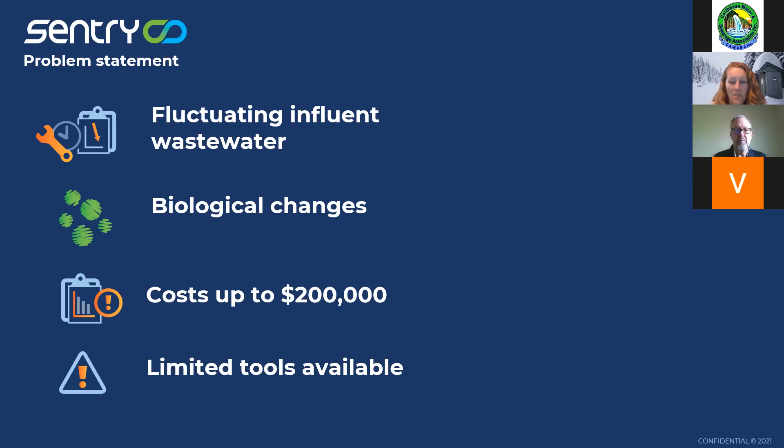As we get started, I always like to start our presentations with saying that at Sentry, we care about the environment, and we're focused on facilitating better water and wastewater treatment decisions for better environmental outcomes. We do that through offering this additional data. It seems simple enough as a mission, but as all of you know, as operators, there's a lot of factors and challenges which make wastewater treatment not the easiest task. You have your incoming influent, which is changing. You have upstream dischargers who are discharging things at any time, not necessarily telling you what's in the wastewater or when it's going to arrive, and that's well out of the operator's control. You're also working with a live biological process, which means there is variability in how the biology is going to react when the water arrives at the facility.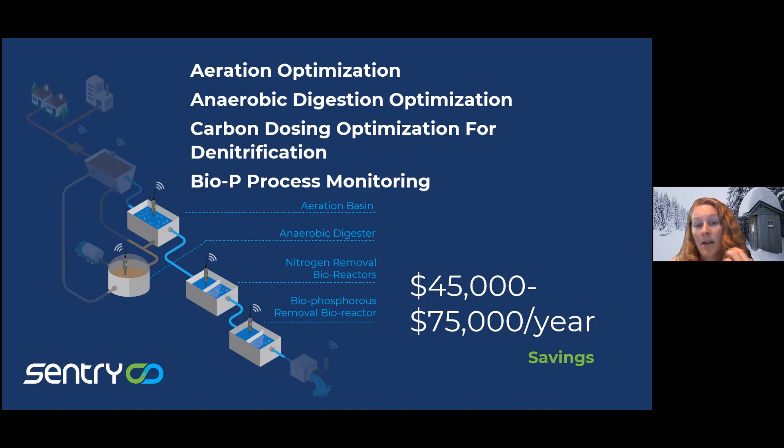So a little bit more information about the system itself, more tangibly. So we have the panel, which can be installed outside. A lot of wastewater treatment facilities are mostly external. So the panel is installed, and that's where we have the connectivity. It's kind of like the brains.

And then the sensor itself can be installed in a channel, which is a really effective place for having the right amount of flow into a tank, like an EQ tank, or into an inline, like a recirculation line. And so these different ways of installing allow a little bit more flexibility, because no two treatment plants are really alike. So as we're trying to figure out exactly where the best place is to get the data you're looking for, we're able to install it in a variety of locations at the facility.

The goal is that it's a low maintenance sensor. So as it uses the biofilm, we want that biofilm to grow on the sensor. And so we recommend at most monthly or quarterly inspections. And if it does need to be cleaned, then a rinse is usually adequate to dislodge any large debris.

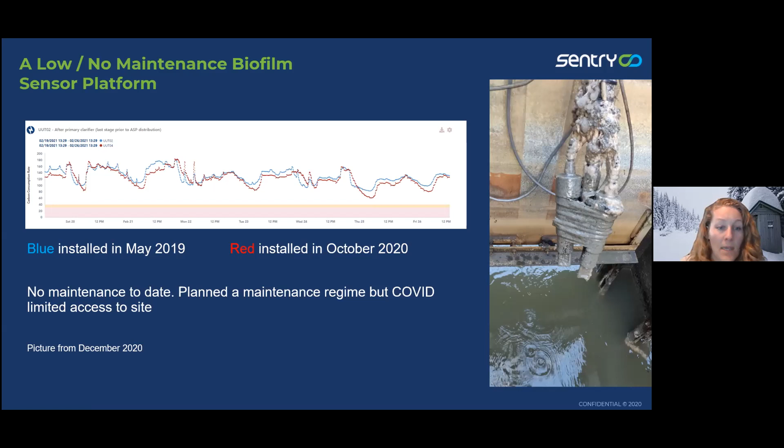So as Ignatius mentioned in the intro, we're now well over 130 installations globally, and that's in systems ranging from classic wastewater treatment, anaerobic digestion, heavy industry, and all the way to raw water intake monitoring, and even monitoring in the distribution system from drinking water facilities.

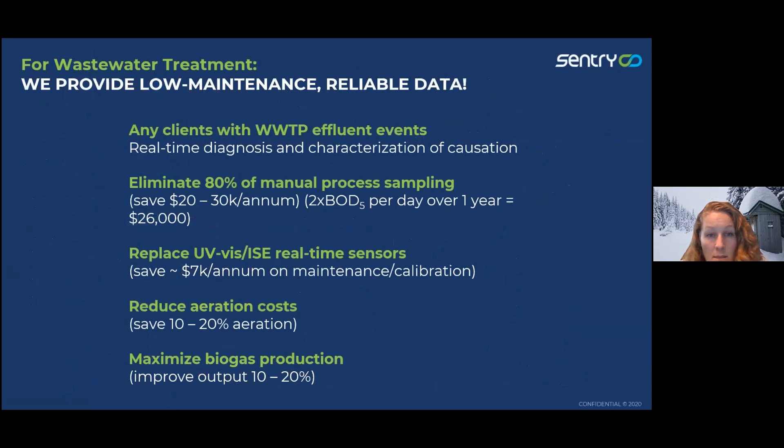So I'll jump forward a little bit and just talk again about the real value of having this real-time, ongoing, and biology-based monitoring, which is that it's giving a good indication of organic loading. Sure, COD and BOD do that too.

It's just that those are usually only one or two samples throughout the day at most, or you're looking at a composite. So you're not necessarily knowing what's coming in exactly when it came, to be able to make those adjustments on time. Or you're looking at a DO sensor or an ammonia probe sort of towards the end of the treatment train. So if you flag something that's out of range, there's not really a lot you can do to act on the water that's going by the sensor.

It's kind of already gone past. So having that upfront bio-based detection tells you how this water will impact your treatment biology. Is it going to like it and be really, really active? Or is it going to cause a die-off? So I need to be a little bit more vigilant about adding any supplemental carbon, or maybe doing a bypass, something, whatever is in your capacity at the facility to be able to manage that. But it tells you when you need to know, and not after.

And then the additional part is having such a large data set, with 1,400 data points per day. Now the patterning and the statistical analysis around what comes in on a Monday morning versus a Thursday afternoon can start to pick out the trends throughout the week, to be able to do preemptive planning, to do maintenance on lower load days, or to recognize that Mondays are going to be a tough one, whatever it is that you start to see in the data. And it can also help diagnose specific issues that may be reoccurring, to better identify them as they start.

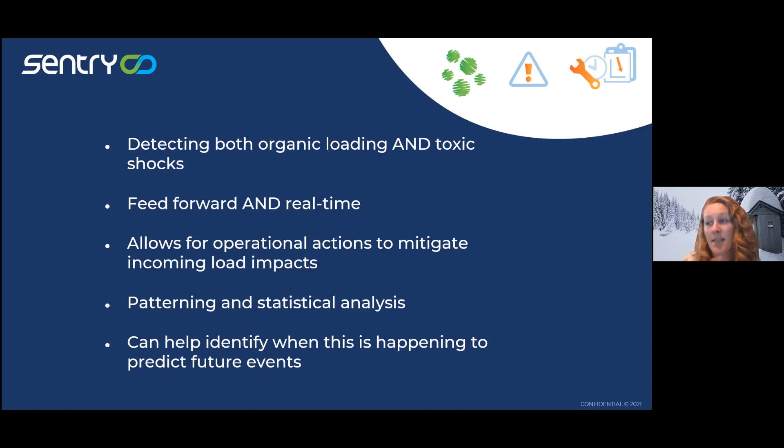So I will pass it over to Tim to talk about his experience at Bend. And while I do that, I'm going to pull up our statement of, our standard operating procedure. If I can find the right file here. Sorry, one second. There we go.

Just as a little bit of background on how the Sentry signal can be used to trigger some of the actions that would normally take place, or even increase your capacity to act as an operator.

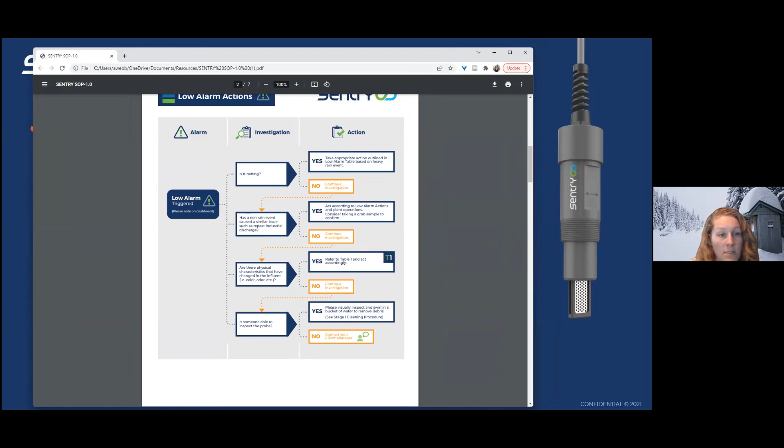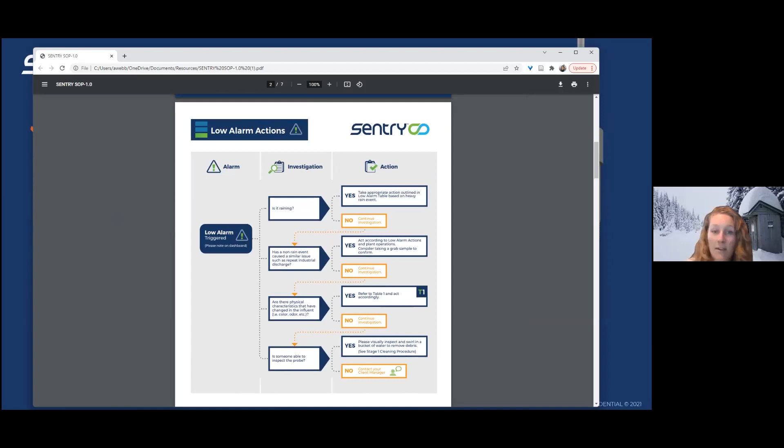Tim, I'm not sure if you wanted me to pull up the Bend slides, or did you want to just talk to them? Are the slides the case studies in your presentation? Let me double check and I will let you know. I don't think I have Bend. I can pull it up though. That's okay, you could go back to... oh wait, first, yes I do. It's here. Okay, good job, that's great.

Because the effluent from this facility is discharged into infiltration evaporation ponds, the regulatory agency wanted to make sure that the nitrates present in the effluent from the facility would not impact drinking water for the down gradient users of that groundwater. This facility is situated in a very popular tourist location.

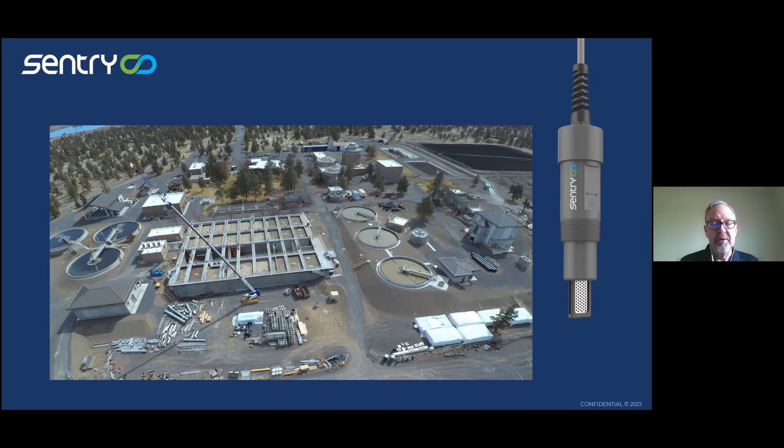The mountains are close by, so skiing, fishing, water sports generally, and hiking are all very important parts of the local economy, as is the 26 breweries that happen to be located in Bend. This facility has approximately 24 breweries connected to it of various sizes, some are 100 gallon fermenters up to 12,000 gallon fermenters. The municipal population is about 90,000.

The population equivalent, however, is more than double that, and that's because of the high strength waste associated with these breweries. As a result, I faced some challenges managing a plant with extreme swings in the organic loading coming into the facility, coupled with the COVID pandemic and the lack of human resources in the laboratory. I felt like I was flying blind a lot of the time.

Now, this sensor was installed in the primary effluent of one of the 3 primary clarifiers to give me an indication of the amount of organic matter that was going to go over to the activated sludge system. The facility has a lot of problems associated with poor settleability associated with a zoogloeal biomass, a slimy kind of biomass that would not settle very rapidly.

So I was forced to operate at very low solids retention times, so low that it became difficult to do nitrification and denitrification to get to our total nitrogen limitation.

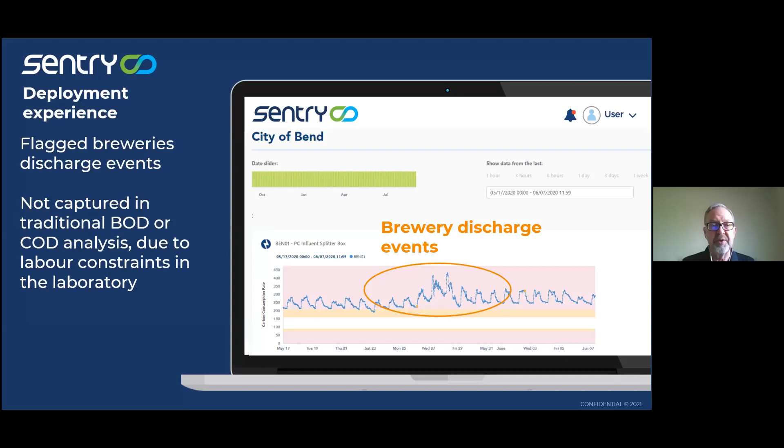As a result of seeing the organic loading increasing, there were a number of things that I, as a manager, could do to manage the processes of the plant to try and mitigate the effects of this slug load which is coming in.

One thing was to change the internal mixed liquor recycle rate to return more nitrates to the head of the anoxic zones at the front of the aeration tanks, with the idea that the oxygen atom on that nitrate molecule would be used for BOD respiration. It also gave me the ability to know when I could increase or decrease the DO set point in our aeration tanks, saving some electricity during that process.

It also allowed me to look at the pattern of organic loading into the plant, and because I had some control of the ability to return high concentration centrates from our dewatering processes, I could look at times of the day when the organic loading coming into the plant was low and return that high centrate concentration during that time of the day.

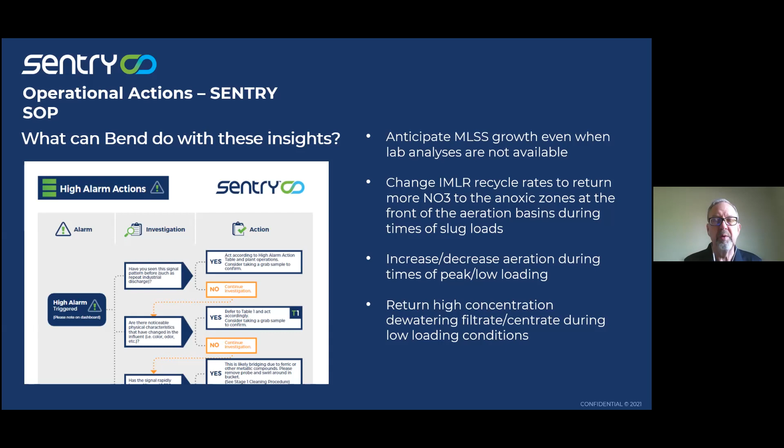Another example of optimization might be in a trickling filter, where you have the ability to change the recycle rate and you're looking at optimizing the amount of BOD removed in your facility. If you know the amount of BOD entering via the Sentry sensor, you could increase the recirculation rate through the trickling filter to remove more BOD before it goes to secondary clarification. That's another example of applicability, especially in warmer climates.

Nitrification and denitrification are other applications where we can help optimize loading ratios. I'm not sure how many of you are on the drinking water side, but I can also walk through a case on freshwater influent monitoring, source water monitoring like watershed management, and/or distribution, like chlorinated drinking water distribution. Not sure if any of those resonate with anyone.

Speak up, guys—glad to see something on the water side.

I can definitely do a water side one, and if people want to type their question in the chat, if you're not comfortable speaking out, or you have any audio challenges, feel free to get as technical as you'd like or as high level. We recognize this is a bit of an unusual approach to sensing technology where there's no chemical reactions—well, there are, but they're happening naturally with the biofilm. There's no catalysts or moving parts or consumables, or what do you call them—aliquots.

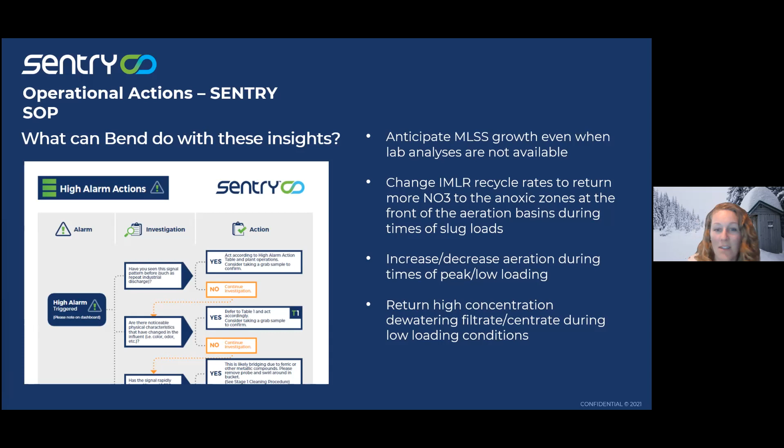So anyway, I'll stop talking for a minute and see if anyone does have any questions in the chat, or by raising your hand or just coming off mute. And then if not, I'll jump into some of the freshwater work that we're doing. Oh, I haven't seen anyone with any questions in the chat.

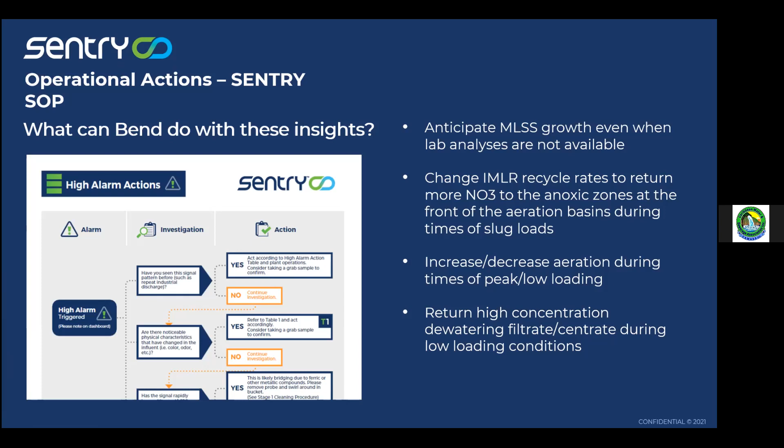So perhaps you can move on to the freshwater situation. Sure. All right, so one of our cases in freshwater monitoring is very much freshwater quality monitoring.

It's in a watershed management capacity. We have a partner in Orlando, Florida, the Lake Cane Restoration Society, a nonprofit whose goal is to keep their lake swimmable, fishable, and lovable. They've had some concerns. They're right beside Universal Orlando, and they've been concerned for many years about the impact of the big parks and the urban development on the quality of the lake, which is very loved and very used as a swimming lake.

They've been seeing some eutrophication, which can lead to algal blooms or a changeover in the natural plant life in the lake. One of their main concerns is this small stormwater retention basin that drains directly into Lake Cane. Lake Cane is spring fed, so there's no large river source, but it does get fed by this very small retention basin. They've been concerned about how the residents are managing their own stormwater runoff into the retention basin and how that's impacting the health of the lake.

So what we were able to do is put Sentry sensors near their manual sampling locations. Because they have a volunteer organization doing manual sampling, they have an established plan for where they sample. We were able to put a sensor near the influent from Lake O'Dell, and then in the water a little bit more, about 100 feet offshore, to start to understand the impacts of general lake health and the influent from Lake O'Dell specifically.

And the findings were very indicative that the Lake O'Dell influent has quite a significant impact on the lake health as a whole. Now, the sensors are relatively close together, so I'm sure we would see a much smaller impact to the far reaches of the lake. But it was definitely a great stepping stone for them to start having those conversations with the property owners around Lake O'Dell, with some hard data to show that their activities are having an impact on the larger environment.

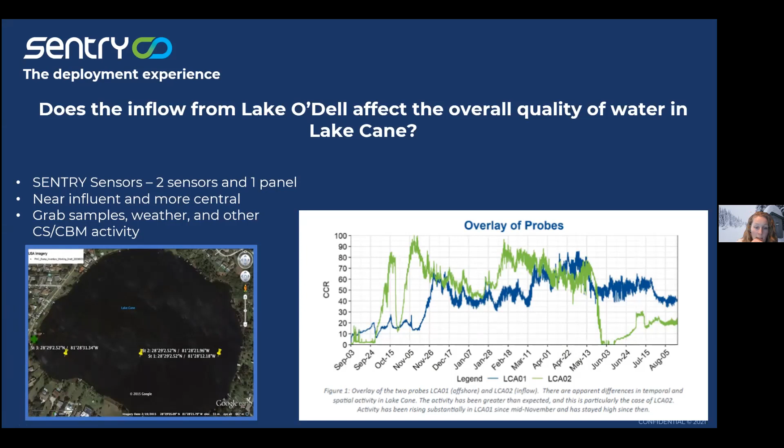Additionally, in a watershed management environment, when you're able to get a baseline of what the data is now—and this is relevant in any facility—you can actually evaluate the impact of any changes you make. You can also flag poor water quality times or days to reduce risk or to start to pinpoint the actual causes of some of those poor water quality days.

Is it right after a rain event, where you have large overland runoff? Or is it when it's really dry and you're not getting that influx of fresh water? Trying to figure out what's actually contributing to poor or better lake health or water quality can help you encourage the good things and intervene during times when it's not ideal. It can also help develop issue-specific interventions instead of trying to deal with a problem broadly that you don't really know where it's coming from.

For example, knowing that the influent from Lake O'Dell is causing these issues, maybe some of the filtration or the naturalization of the shorelines can be focused in that area to try to mitigate that source of incoming organic loading. Also, that hard evidence that these actions do have an impact can help promote policies in the region that really do help lake health or reduce impact, by, for example, building too close, or septic tanks, or whatever else is impacting the lake health as determined by the data.

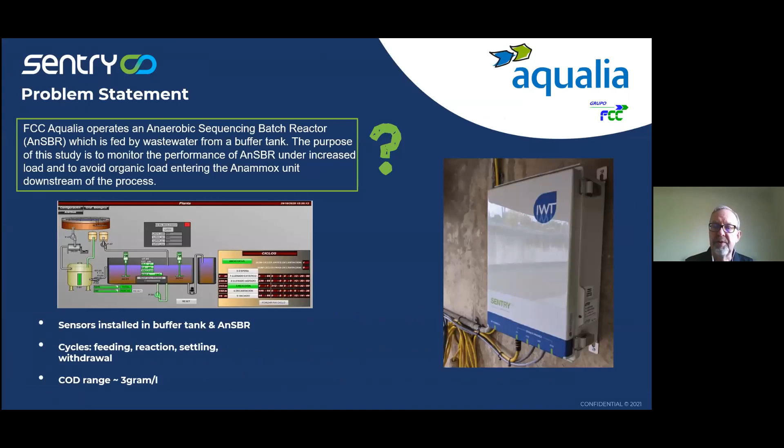While Alex is doing that, we should let you know that our typical offering is a 6-month trial where we send a panel and 2 sensors to our clients. They install them in locations appropriate for understanding their water quality issue, and that 6-month trial provides enough time for us to understand the signal being developed by the sensors and to offer suggestions about causes of that signal change and other things they may do to their treatment facility to mitigate harmful effects of toxins or high strength waste entering the facility.

I have a question - or a comment. Afternoon, everyone. Joe, invited from Trinidad, dealing with the sewage treatment plants I deal with, or just from comments from other operators.

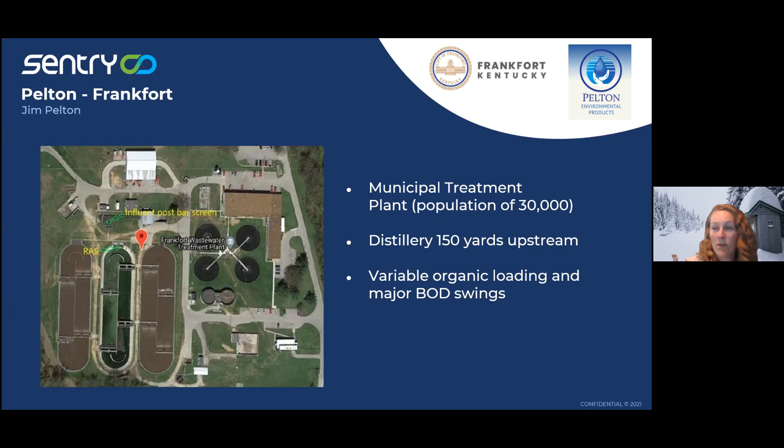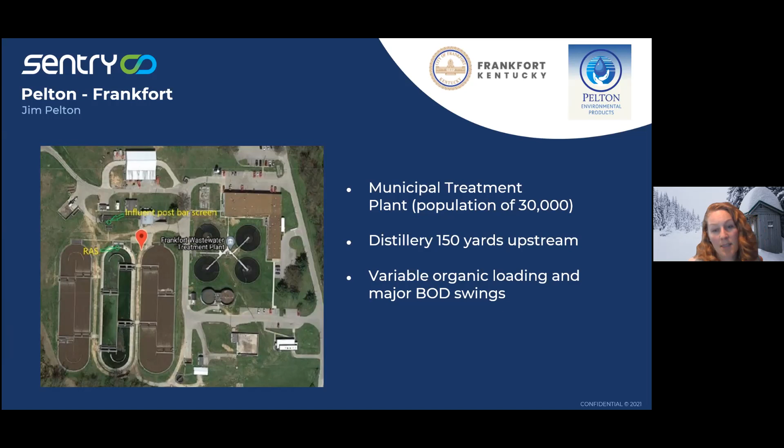So they installed the Sentry in the influent and in the RAS system to track what's coming in and when, and how it progresses through the facility - to profile what comes in and flag those events. As we install the sensor, because it's live biology, the absolute values may differ from facility to facility depending on what comes in. So as the sensor shows us the normal range, we establish alarm bands. Once the sensor picks up a signal outside that established alarm, an email is generated to whoever wants to be on that list - to the people who need to know, so they get an email saying 'hey, something's going on.'

The sensor was installed to identify these distillery events, which it did. It also identified that the plant is particularly susceptible to high rain dilution, which I don't think they suspected - but this showed that when there were high rain dilution events, the treatment biology was impacted fairly significantly.

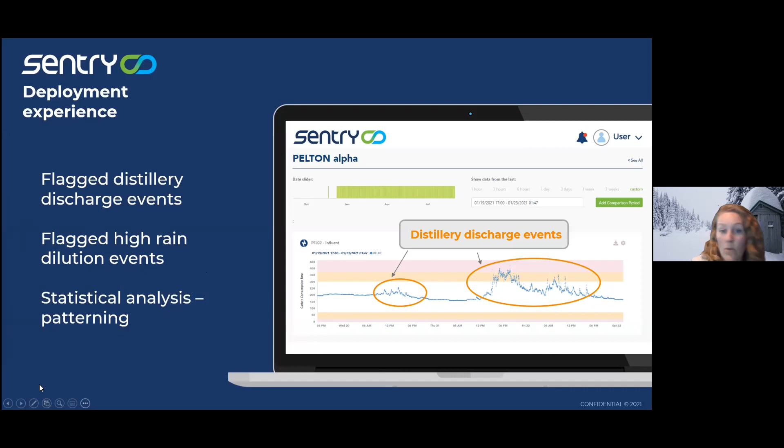And then the other finding was very interesting. As we were able to do the analysis, instead of getting 1 or 2 samples per day, we're able to get a really good idea of what happens and when over a longer period of time. What we identified is that, for whatever reason, Wednesdays are really weird. So we asked them, what are you guys doing on Wednesdays? What's that about? They said, well, I don't know, maybe it's the distillery. So they talked to the distillery and found out it wasn't the distillery causing these unknown spikes and drops and all kinds of activity on Wednesday.

What they found out was that it was actually the day the leachate trucks dump into the receiving station, and it's the day maintenance is done on the EQ tank where they clean it. So not only were they getting this huge organic load, but they're also introducing a biocide to kill the biology on the same day. That was actually what was causing all these problems. So they thought it was the distillery, but the real finding was that they had a disconnect between some of the collections activities and some of the facility activities going on.

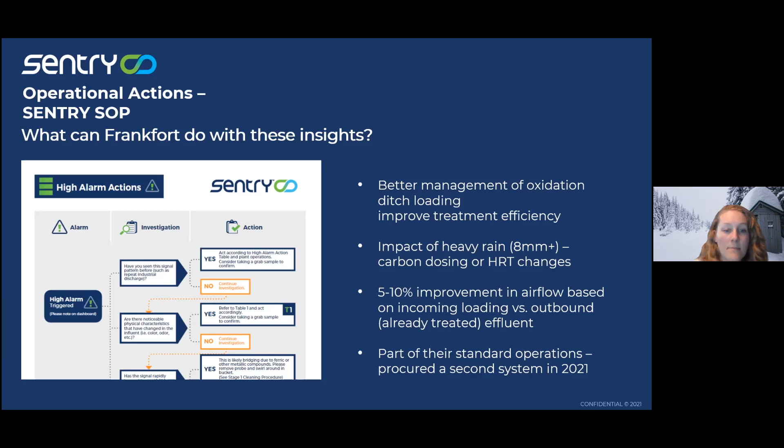And I did want to go back, sorry, I'm going to hop back through these. I have all my cases in this one.

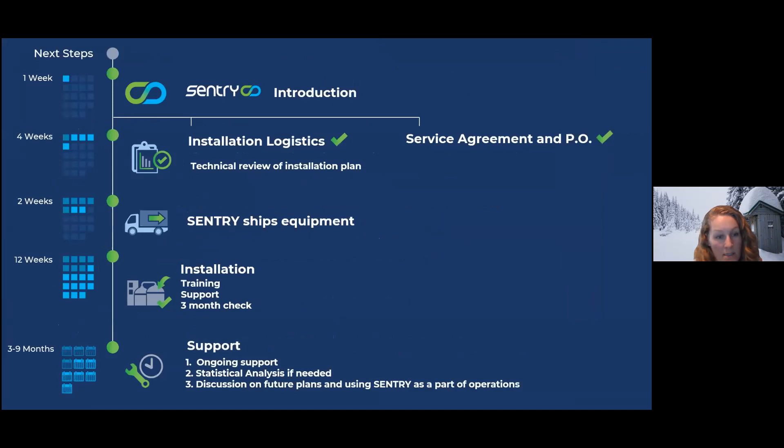I just wanted to mention quickly, I know we're talking about this tech solution called Sentry Water Tech. It's innovative, it's new, etc. But one thing I really wanted to highlight is that it's designed to go into wastewater and designed to be simple to install. You have these probes that can be installed in different ways. They're not finicky, there are no little tiny bits to connect to other little bits. You can develop your own infrastructure for putting it in, and we have guidelines for that. The panel itself just needs a plug and cell phone coverage. So yes, it's high tech, but it's designed to be a very low barrier installation system, because we recognize some of these treatment facilities are not new, shiny, and super connected, and some of them are. Being able to get the data while you're still deciding on upgrades, or if you don't have the budget, all the way to when you start to implement those upgrades, it can transition in during those times too.

It looks like Timothy has a question.

Hi, good day. A very interesting system you have there. Just wanted to know what is the unit of measure that the system uses, so that if we have to go to our local authority, the EMA, for the water pollution rules, we'd need to let them know that. I know it more or less measures or tells you the activity of the microorganisms, right? But what unit is it using? Is it milliamps, volts?

I'll let Tim take this one. I can do my own take, but I think Tim will hit it on the head.

The signal is microamps. We're actually measuring the amount of electrons moving from anode to cathode through the circuit.

This is unlike most other measures of organic matter, what we refer to as OMOM. Those other measures of organic matter are all concentration based. This is a rate based measure.

We have been able to get good correlation between our measure, which we call carbon consumption rate, and those other measures of organic matter like BOD or COD, TOC, volatile fatty acids. So it's a different kind of measure, but it is widely applicable and comparable to those other measures that are more familiar to operations personnel.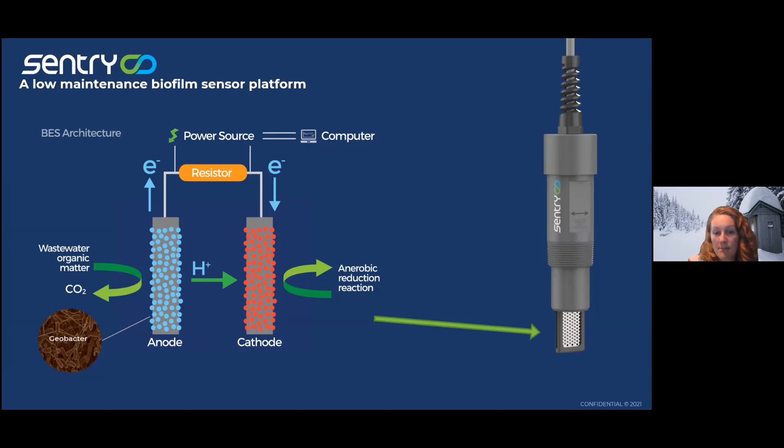Hello, has everybody disappeared?

I should let you know that a major focus of mine over the last 6 months has been improving the ways in which the sensors are installed to try and avoid problems associated with the wastewater environment.

For example, we know that installing a sensor downstream of a screening device is much better than upstream, just because you're taking rags and other trash out of the waste stream before it reaches the sensor.

We're also looking at ways in which the sensor can be mounted in channels and tanks to minimize the catching of any rags or stringy material that may get through a bar screen or other screening device.

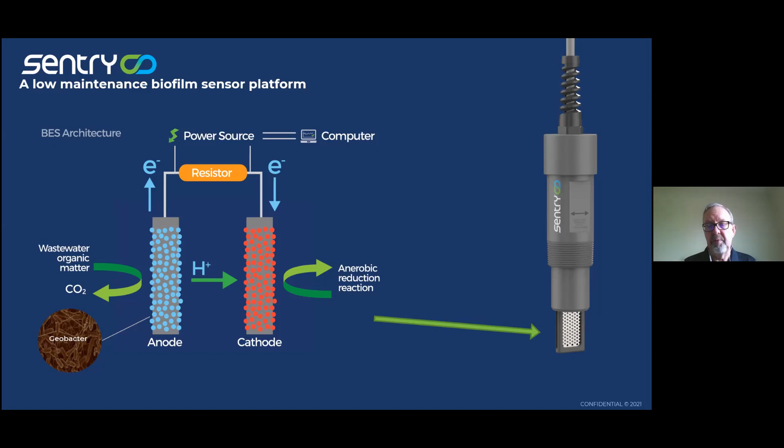So the actual installation depends very much on the tank in which it's going to be located and the problem statement that the client is looking to achieve through active monitoring of their waste stream.